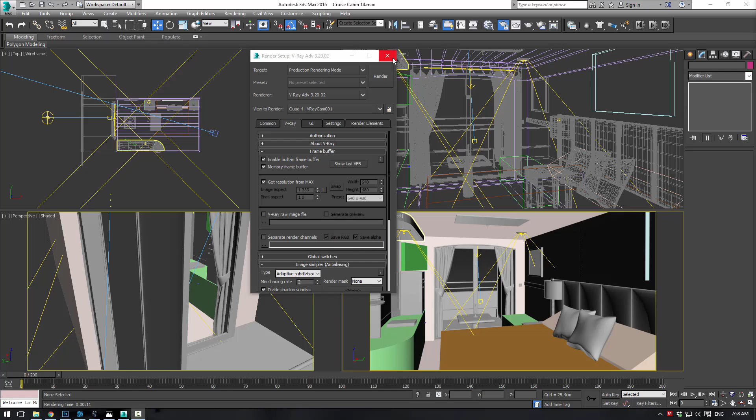Last time we worked on building this vent and the fire sprinkler thing. I wasn't totally happy with either of those, but we're just going to try to salvage it. First, let's make this a bit thicker, then bring it up a little bit since it was just a bit too big. Now for this vent, all that work we did, we're probably just going to throw out. I think we're going to texture in the little holes instead since it's not worth it in terms of rendering speed. I don't want to mess with it anymore. We can make it work if we really tried, but it's just going to be a pain, so we're going to pretend we didn't do that.

Shift F to get rid of those safe frames. Today I think we're going to focus on the desk. I think the desk is a solid choice here. So the first thing we're going to do is grab these layers, or these polygons. I believe that's all. Let's just bring it down a bit.

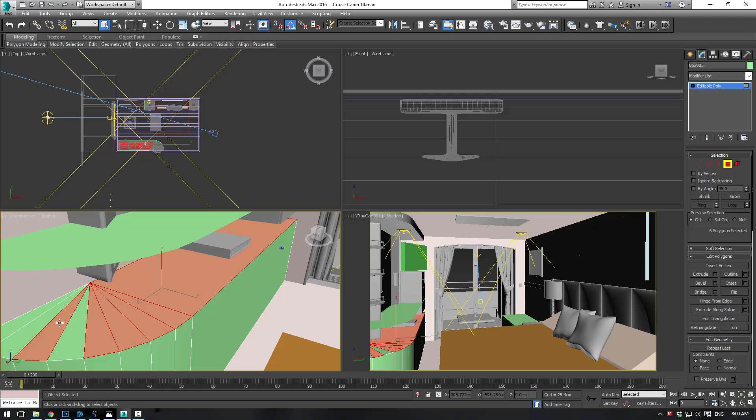Now we're just going to do some beveling. Actually, we're going to Shift drag that up and clone it to an object, because we'll use that later for the glass top. So let's select these polygons again, go into the top view here, and bevel. Let's just make sure this is doing what we want, and for the most part it is.

What we can do here, just to cheat a bit, is take these and extrude. There we go. That way our desk will work, so when we do our bevels it'll cave in on itself instead of not working right.

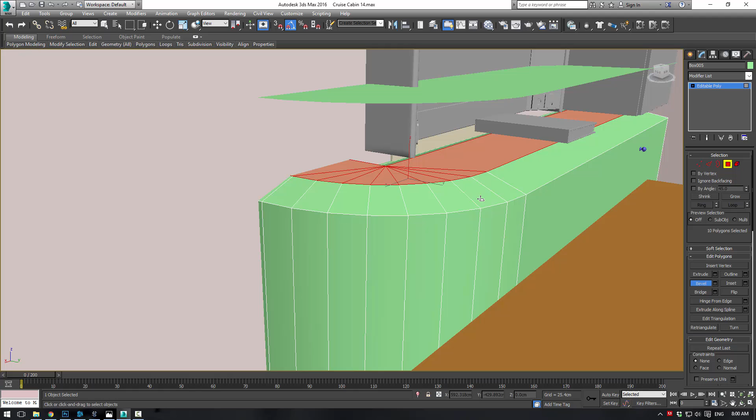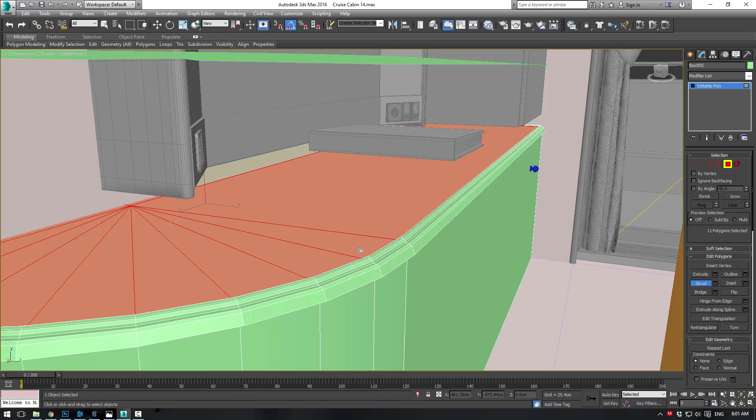Make sure you grab that one too. There we go. Alright, let's start with a small bevel right here, and let's do an outward bevel. Okay, let's bring it back in. Maybe do a small bevel here, bring it in a bit. Alright, that should be good. Bring it up, and let's bring it over one. Same level in one, and then let's go up a little bit, and one more in.

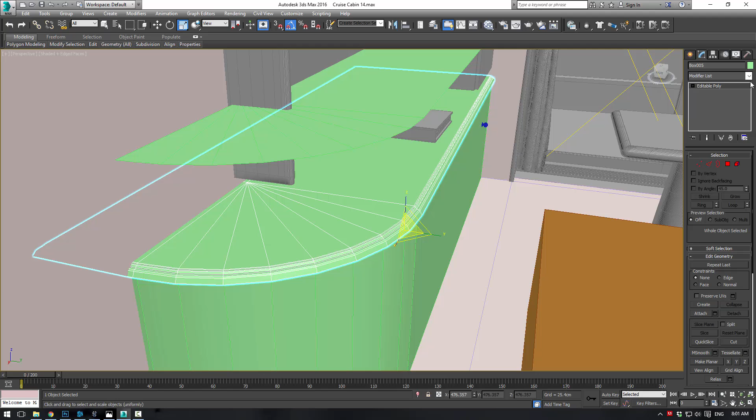Now what we want to do is grab all of these polygons here, including the bottom and the back, and let's actually detach those. So basically all we have is the top. Now if we apply a Turbo Smooth modifier to this, you'll see we instantly get that result we're looking for on the side.

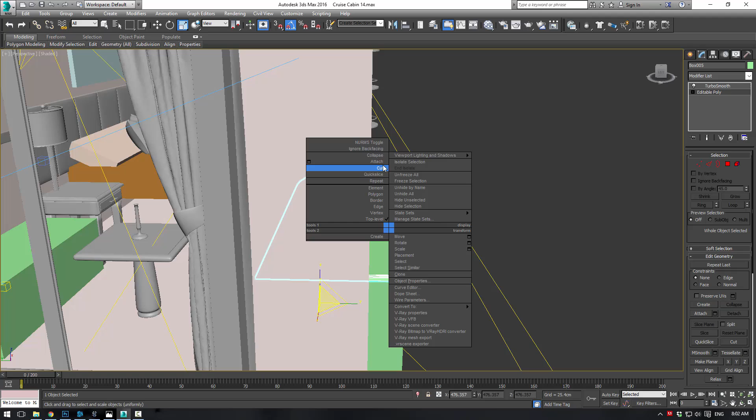Now we do need a bit of cleanup, so let's go back in here, edit poly, and let's see what we need to do. At this point we can isolate the selection just so we can see it a bit easier. And let's see, we can probably go here and connect and simply drag it down to about here.

Let's go into our front view here, grab these polygons and just delete them. Okay, go to your verts, press R, and simply scale them so they're straight together. So now when you do a Turbo Smooth, it won't smooth that corner at all, so you just have kind of a nice straight edge.

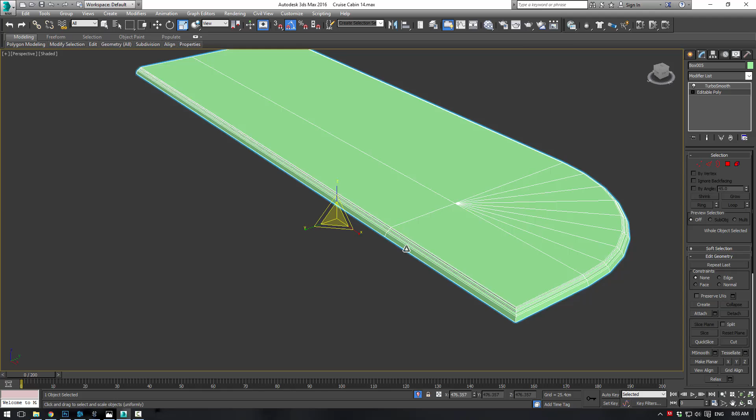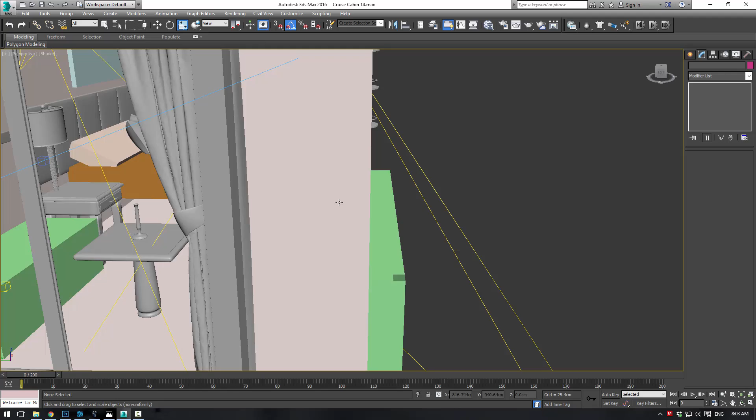We're going to do the same thing for the back here. The other option we can do is select all these polygons, deselect those, and I believe if we delete that, that should give us our desired result. Yes, there we go. So that's about what we want, and we can go to vertex here, press R, and just straighten those up. Alright, perfect. So now if we go to end isolation mode, we sort of have our little tabletop.

Now what we're going to do with this is go here and extrude it just a little bit. There we go. And then let's actually isolate this just to make it a little easier to work with.

And we're going to need to create some geometry here. So let's grab those lines and bring them down a bit, just to make it a little easier on us. So let's go to polygon mode here, and actually what we can do is just shift drag this.

Clone to element, and let's Control A, weld, and you'll see we have 6 welds, so we need a few more than that. 1, 2, 3, 4, 5, 6. Why are we not welding all these? Control A, weld. Alright, let's see what didn't weld. So apparently nothing welded. I wonder where the 6 things we welded were. So let's try a vertex here, target weld, and that'll work. We'll just do this all the way around. There's something wrong.

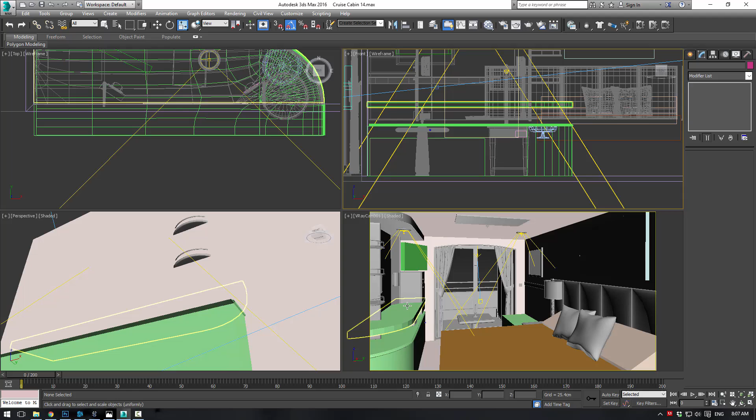So now what we've got basically is this. So what we need to do is actually go here, affect pivot only, center to object, just so it's easier for us. Just scale this down so we get a very thin sort of surface, which will be the glass.

Okay, and now all we have to do is just position it directly on top of this. Grab this puppy, and let's just bring it up to the level of the book. Right about here. Alright, that should be just about perfect.

Yeah, I don't think that will cause any trouble. Excellent. Alright, so there we go. Now we have the glass surface there.

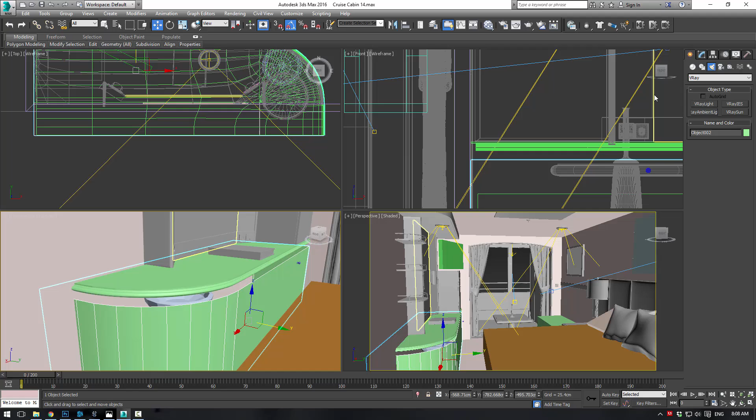And now let's work on the desk itself. So basically, what we need to do here is, let's see, let's isolate this just so we can see what we've got to work with. So we need to sort of create a cutout in here.

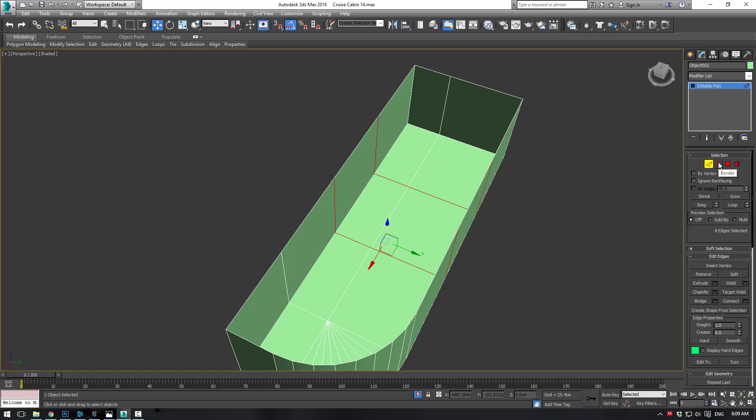So let's go here, connect, give it 2 connections and press OK. And now we need to grab this polygon and extrude it backwards. Okay, just like that. Now grab that polygon and delete it.

Okay, and then we need to grab this polygon and delete it. Good. So now go to our vertex mode here, target weld, and just weld this over here and this over here. That'll sort of give us the little box that we're looking for.

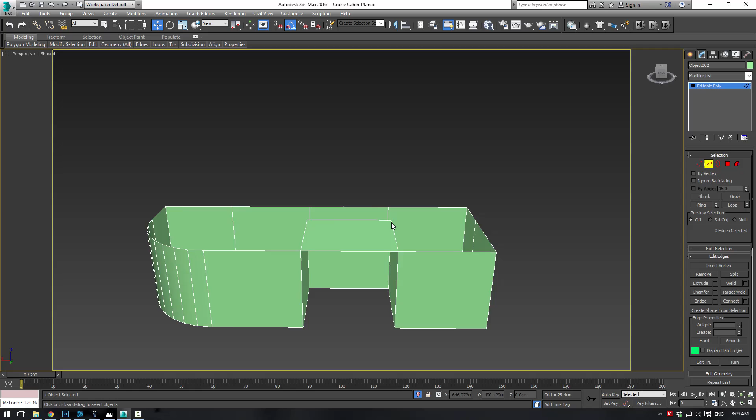And then you can come over here and just make sure that they are nice and aligned. Okay. So now we have that. You don't even really need the surface here. Well, I guess you do actually need the surface. Okay. So next, let's

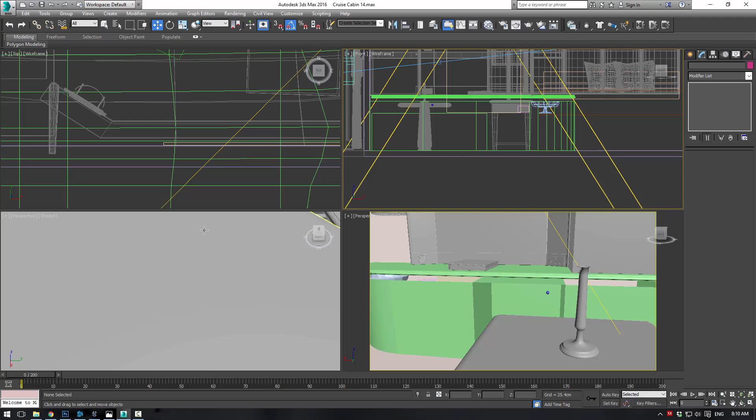think about this. How do we want to approach this? All right, let's end isolation mode. And what I'm thinking about here is the size, because I have no idea the size of this.

That is the one fault of working with only one image, is you don't really know. So here's that edge. The other edge is where? Let's hide some stuff here.

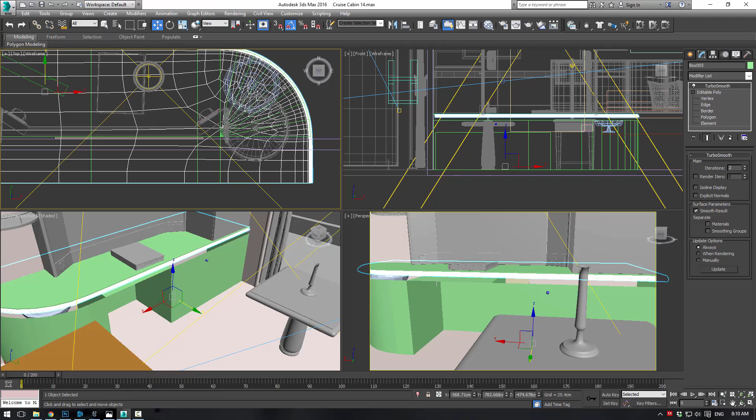Alright. So basically, wrong piece, we need this piece. So here we are. So here's the one edge of the mirror and here's the other edge. So we just need to sort of center it up there and just make sure we have enough room for sort of a chair.

So I'm going to say that is probably not quite enough. So let's just increase it a bit. I know we need to have enough room for a drawer as well, a little small drawer right here. And as soon as the curve starts, that's where the other big sort of drawer opens up.

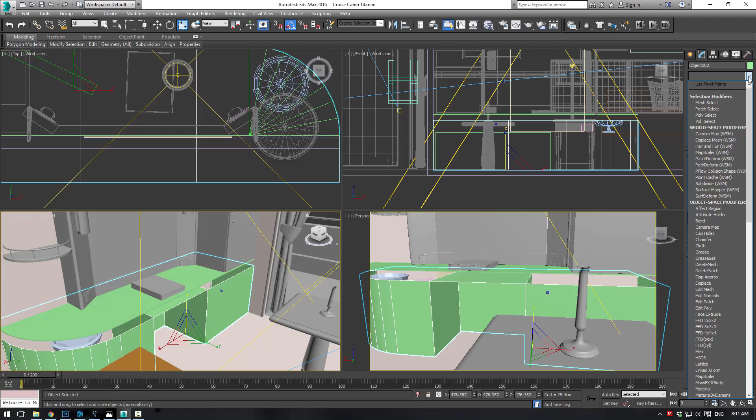Okay, so I'm going to think that's probably enough right there. Okay, so now what we can do is, let's see, if we turbo smooth that, what do we get? A lot of problems.

So let's go in here and we can delete out most of our problems. Well, we don't actually want to use that method. Let's go here, connect, and let's just pinch this outward on both sides there.

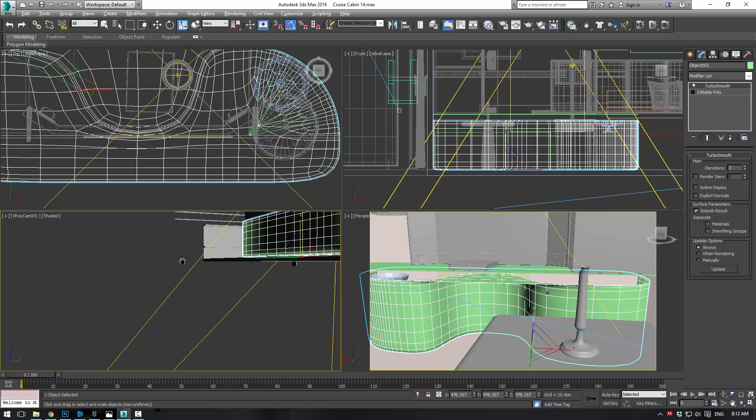Okay. Now what have we got? Damn it. I hate moving the camera. Alright, perspective.

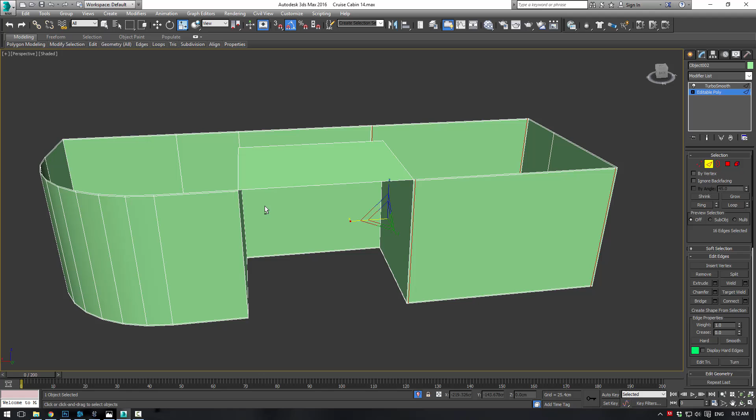Okay, so we've got that. Now we need to work on the edges here. So let's grab this, connect. Good. And then we can grab this, connect. That should be good. Grab this, let's connect it, and let's connect those.

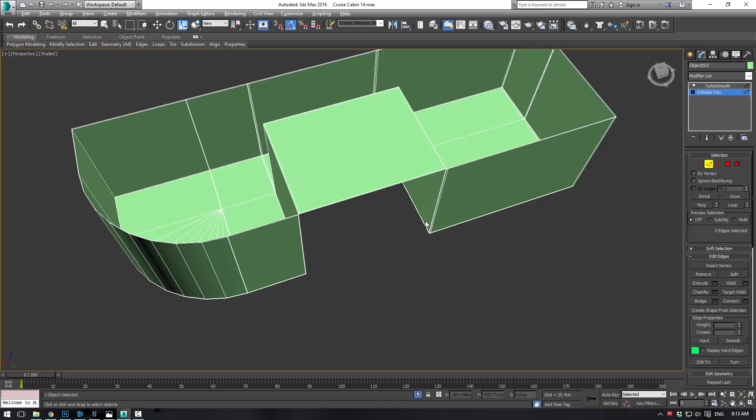And let's finally connect that and this corner. Alright, that should resolve almost all of our problems. We do have some interesting curvage here.

Guess it didn't quite connect. It's not a big deal, so we're just going to do the age-old tactic of deleting the bottom polygons, because that prevents the turbo smoothing from doing its thing.

Alright, let's just Control A, go to the front viewport, and delete everything that's not directly on the bottom. Bingo. So now if we turbo smooth, it should be perfect, with nice crisp edges and corners.

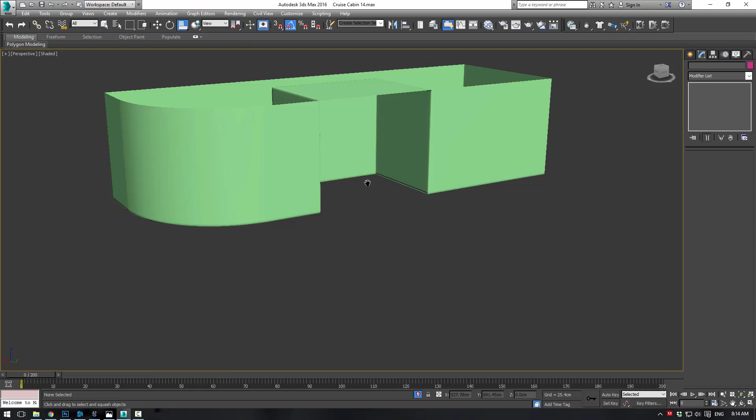Everything's happy. Now what we can do, if we want, is grab that and shift drag, well, extrude in just a bit. That'll give us a little curved edge there in the bottom. Right, end isolation mode.

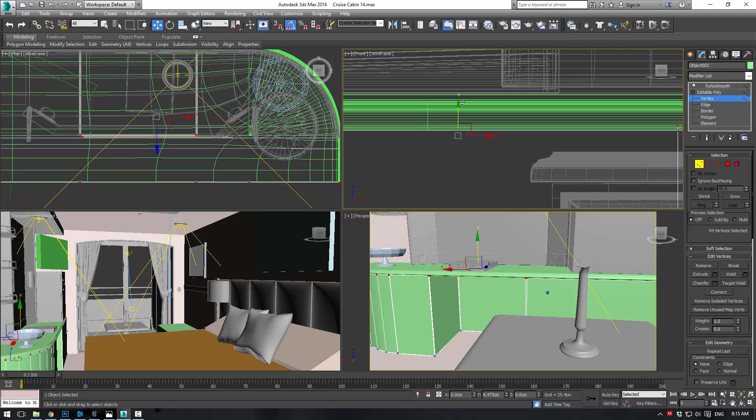Now we need, oh, I wondered where that fan went, I've been looking for that the whole time. Alright, there we go. So go to our vertex mode, grab all the top verts, and actually let's unhide all. Okay, and let's just drag these up, so they're sort of inside the desk there, just a little bit. Right, perfect, there we go.

That looks pretty good. I'm thinking though that maybe our opening is too big for the chair. Watch out, your scale needs to be on uniform. Okay, there we go.

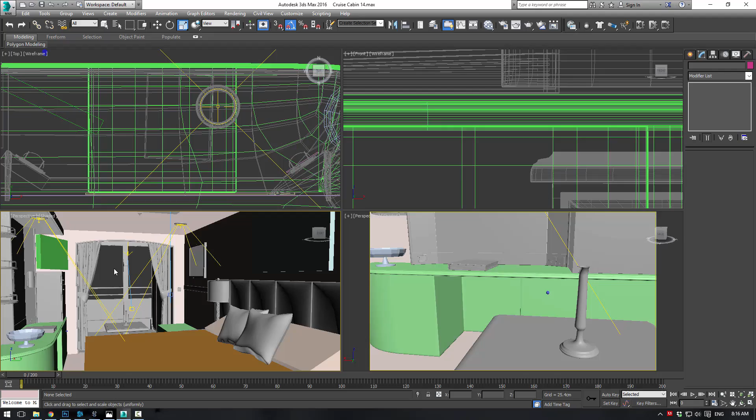So now what can we do, let's see. We need some drawers here. So we're just going to go to group, ungroup, and grab this, it's literally the same thing. Okay, we'll just reuse these. It looks like we're going to have, I don't know if it's one set or two sets. I think they're really long drawers, so we'll assume two sets. Okay, let's grab this, this, and isolate. Now we can do our drawers here in peace.

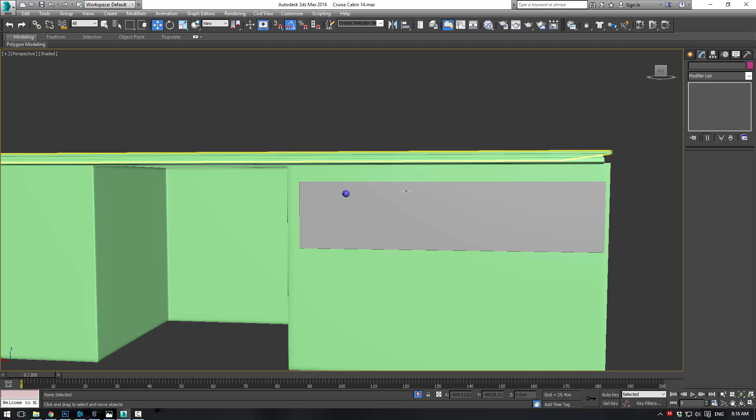Okay, so let's just make sure they go almost to the edge. Okay, there we go, and bring it up, kind of a little below the top there. And for our piece here, we'll just sort of center it as best we can.

An easy way to do that is just create a box with auto grid. Okay, there's your box, give it one segment in each direction. Now if you just line this up with the center of that, you're good. And then line it up, well, you don't have to worry about the other one, but okay. Perfect, so now let's just see how lucky we are.

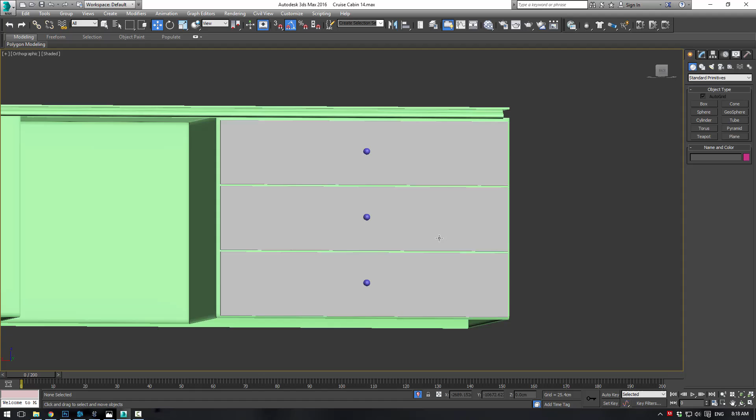And man, I gotta say, it doesn't get much luckier than that when your boxes just sort of fit. Okay, so there's those drawers. Now grab those and shift drag them over here. And actually, we can probably bring them right to about here.

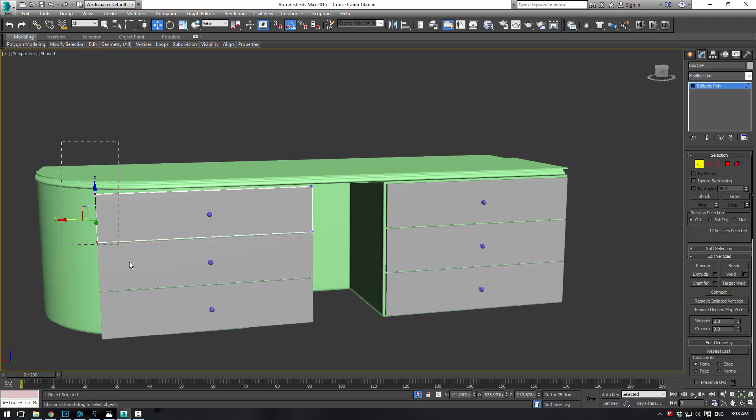Grab these portions, and actually let's just create one. Alright, now these are going to be sort of smaller, so let's see what we're going to do here. You kind of see where the edge of the desk curves, so this is the edge of the curve right here, so little short drawers.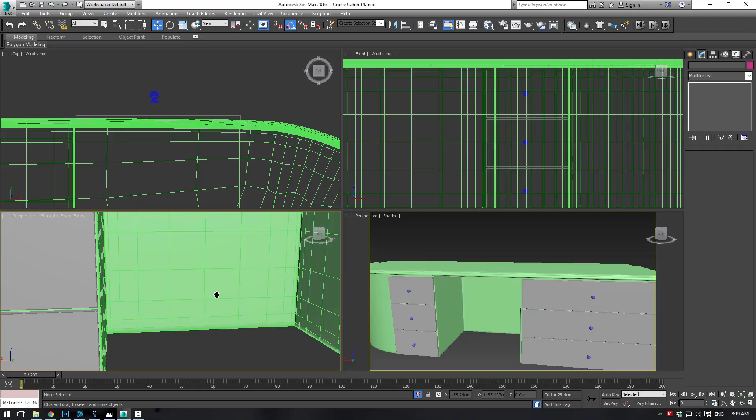And then we're basically going to, let's grab this polygon, and we will grab all of these, press W, and shift drag them out, clone to object. Okay. Let's give this a shell, we'll give it an inner amount. Well actually, no, we do want an outer amount.

This is, by the way, the easier method of creating geometry that I just thought of. And then let's ensure that it fits. So, affect pivot only, center to object, little T here. Alright, so move it into position here. Theoretically, you'd like to hope it would fit perfect, but...

Unless I rotated this, I have no idea why this isn't fitting. How strange. I must have rotated it and didn't know it. The heck? Oh well, I'm sure someone saw my mistake at some point.

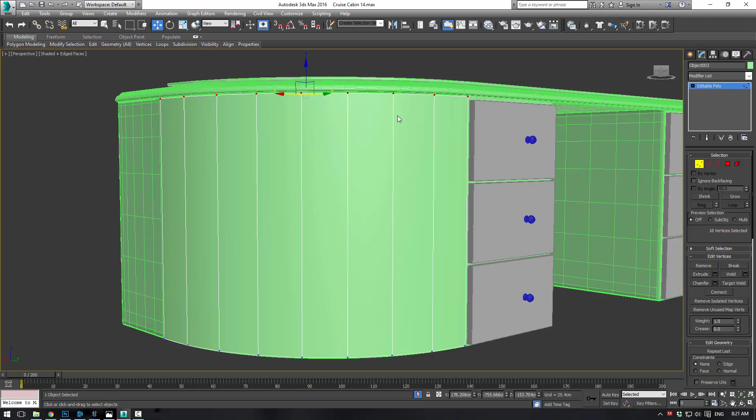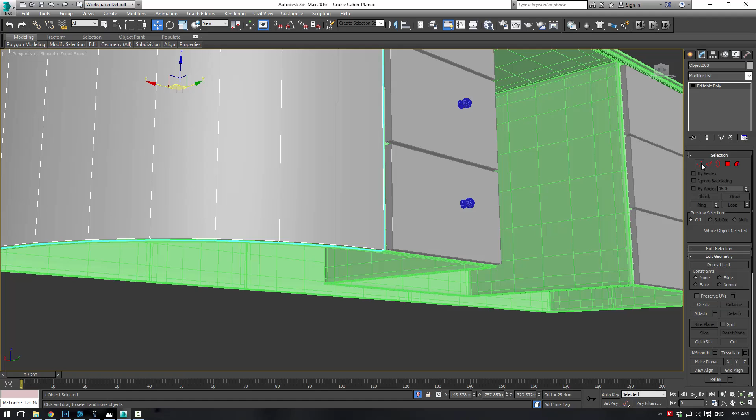Okay, and let's just convert to an editable poly here. Grab these top ones, and in the front viewport, bring them down so they match the gray ones, right below the line there. Alright, let's just make these gray so we can see a little easier. Alright, and then let's grab the bottom verts and just bring them up a little bit, just so they're not resting on the floor. Okay, and that looks pretty good.

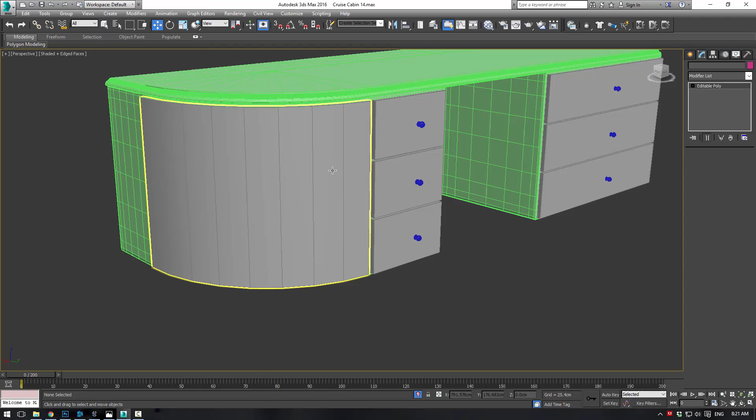Alright, so grab all of this stuff here and do a connect, two connections, pinch it out, 98 will work, and then I'll go here, shift, connect, and do your small little pinch. Okay, and then if we do a turbo smooth, I think we'll need one more line, but we do need a line in the corner there, but we're almost perfect.

Okay, so just grab the edges here, connect, you want one connection, and just slide it over the edge there. Watch out. Connect, and then do the same on this side, except you want to go the other direction for your connect. Minus 92.

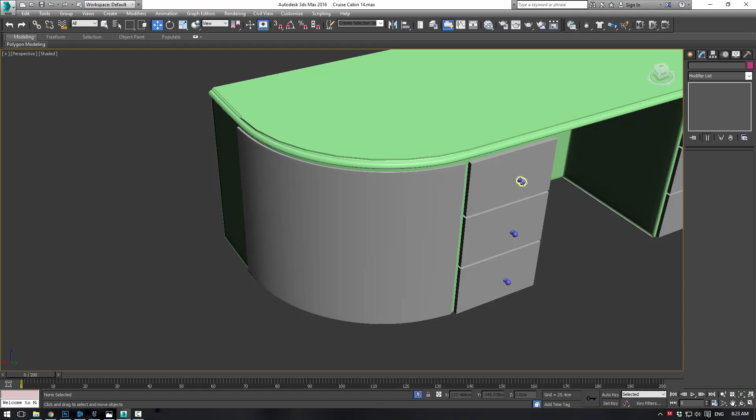And there we go, now we have a nice little cabinet piece. So grab this and just shift drag it over, and we can sort of put it in here near the edge where it would actually be, or at least almost be. You can probably rotate it a bit, it's fine. There we go.

Now what we can do is, ooh, these are all sort of floating in space, aren't they? Let's bring these back. So select everything here, assign it a gray material, end isolation mode here, let's go into our camera view. Let's see how we're doing.

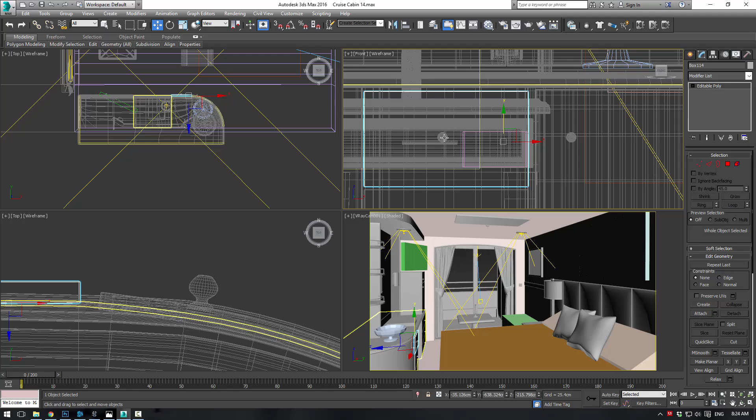And man, I think we did pretty damn good with that. Although this, we may need to make it a bit higher there, okay, just so it sort of matches, and then this one maybe bring it a bit higher as well. Actually, we can, watch out, just select all of this. That'll get all three of them, and just drag them all up just a little bit. Okay, perfect.

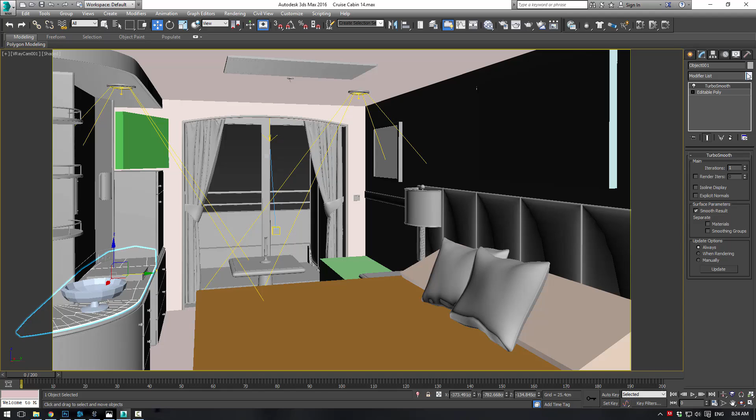So there we go, that looks like, ooh, this top piece, we forgot this. Let's give this a turbo smooth, and then we'll fix that real quick. So isolate selection, perspective.

And so this needs a little bit of treatment here. So connect, one connection, and slide it over the edge there. And then just get a little closer. And then we're gonna need, let's see, actually that's probably not what we want to do. Let's select all of the internal polygons here. Inset, we'll just give them all a very small inset.

Okay, and now if we turbo smooth, that's not what we need either. Okay, so we do really need, we need to do the edges, that's what it is. So select that, control click, I'm just selecting the corner edges here and chamfer. And you'll see now the corners are getting a little chamfered.

And that should resolve our problem, mostly. We'll just connect that anyway and see what that does for us. Ha, success, and mostly success.

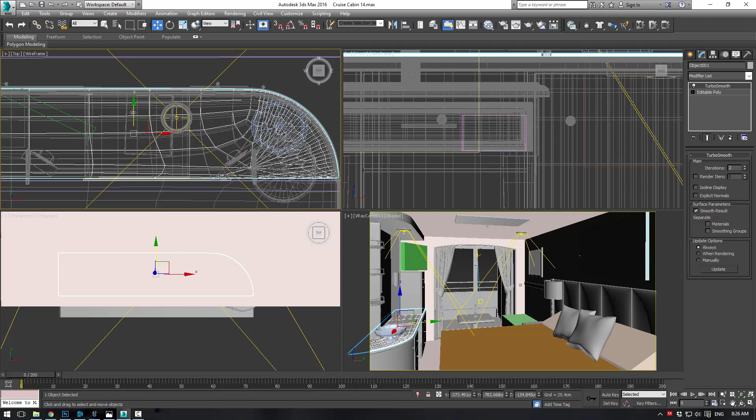That looks pretty good. Maybe I actually grab this and move it back just a bit, and then move it over just a bit, just so it's sort of on top of the surface, not right at the edge. All right, perfect, just perfect. All right, so that'll be the end of this part, and I will see.

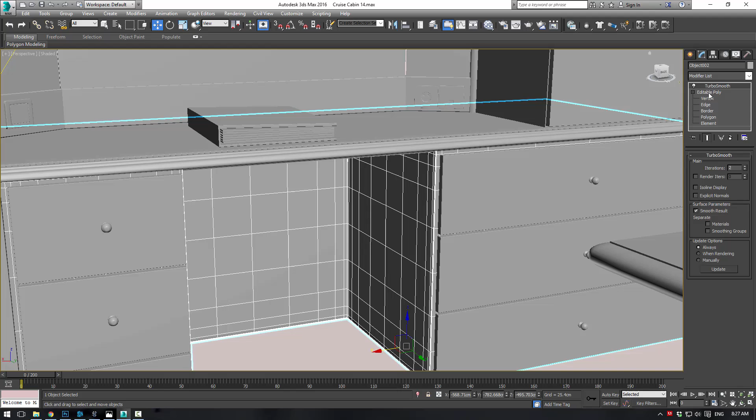Wait, no, I was almost ready to give up here. Looks like we're missing a drawer. So perspective Z, let's fix this. So there's actually a drawer right here. So how are we going to fix this?

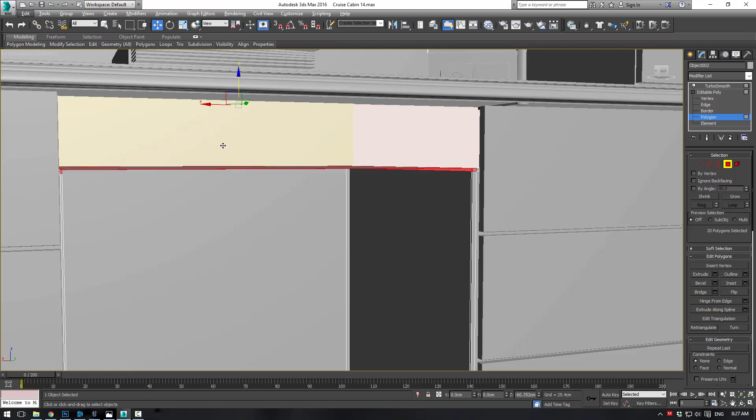Polygon, let's grow it. And grow one more time. Alright, so what have we got? Okay. So what we need to do is press 1, grab all of these, and actually let's isolate this selection here. Alright, so we don't really have a top on it.

So basically we need this to sort of come down here. And then, alright, how about we just select this edge, and this edge, shift drag down a bit, and then shift drag back. Yes, and then we need to chamfer this edge, just give it a very small chamfer. That's not quite what we want.

We really do need to do this correctly, I guess. So we'll undo that. We won't undo that, that's cool too. Just delete these things we made. Okay, how do we want to go about doing this? There's got to be a method here.

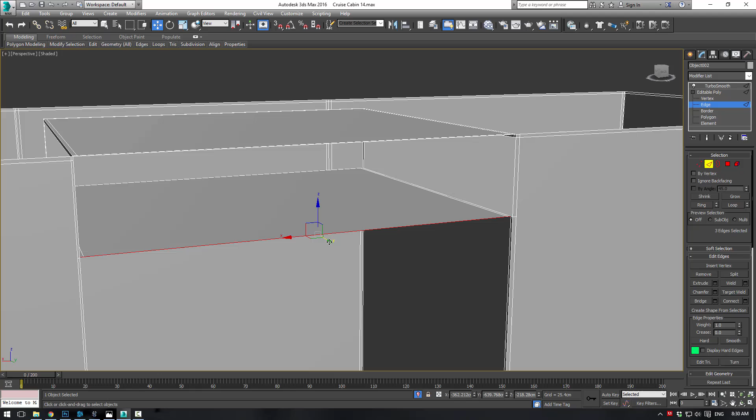Alright, and now what we can do is take this edge here, grow it once, and shift drag it out. Okay, do 1 and 2. Alright, now what we need to do is go to our vertex mode here and target weld.

He's not going to want to weld. Oh, there they go. And weld. Good. And then let's go on the other side. Weld. We should be 2. Good.

Alright. And now we need to grab those same lines and go up and then up. Okay? Just like that. Weld. 2 have been welded. Alright, go here, weld, and 2, only 1 has been welded.

There we go. 8, 7, 6, 5. That's too many. Let's see exactly what's going on here. So we'll go to target weld. Sort of odd.

Why don't you want to let me weld you? Ah, that's why. Alright, so target weld. Alright, that should be almost all of those. Nope, not this one yet. What's this one connected to?

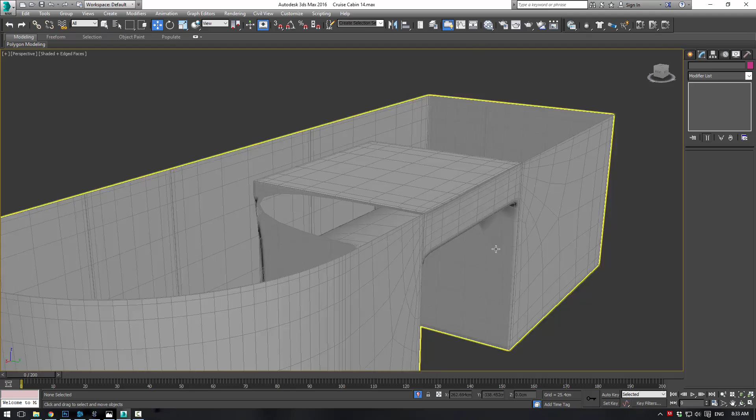Oh man, we're so close. Well, we're not actually that close. Alright, we're going to take some drastic measures here. So let's just grab this and this and delete.

Alright, that sucks. I should have remembered I had to do that piece. Alright, and delete. So there we go, now we're back to square one here. Delete that. Whatever the heck that is. Delete it. I don't need it.

Alright, make sure that doesn't have any. Alright, delete. And delete. Okay. So now how do we do this? We need a line sort of here.

Alright, so control, shift drag. Okay, we got that. Problem is that's not what we want. We just want to bridge these. That's really all we need.

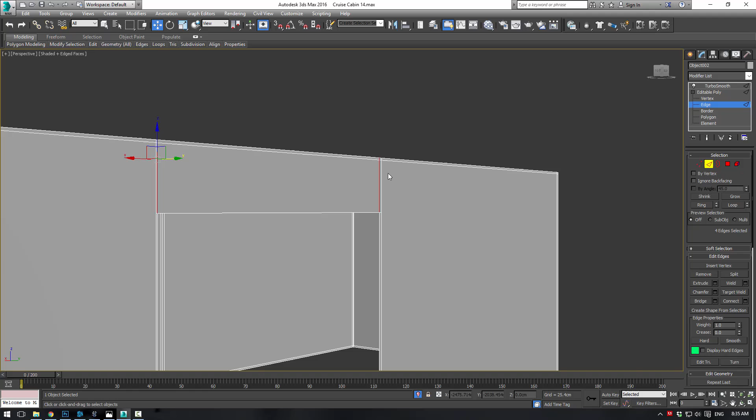And then we come in here, grab these three, or four, I guess, and 5. Okay, and then we can shift drag it back a little bit, and then shift drag it more, and then what we can do is

grab this top line, oops, careful, and just see, drag it down and drag it down. Okay, grab your vertices in the corners there, and you've got your 2, and you've got your other 2.

Okay, oh, we're getting much closer now. Okay. So now what we need to do is add some chamfers. Actually, don't really need chamfers, we just need edges. So go here, deselect your back edges, connect,

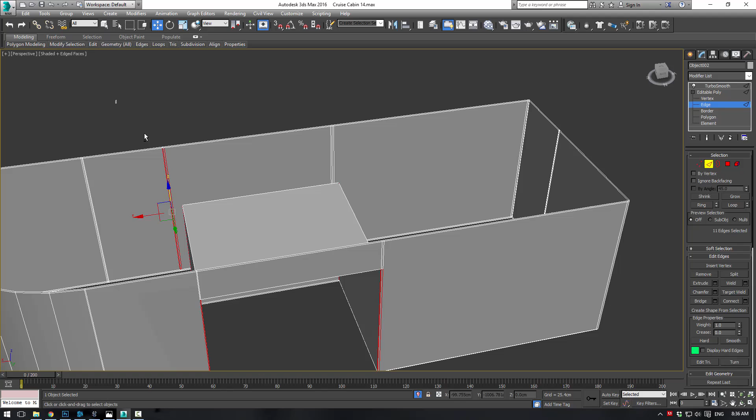and bring the slide up to the top there. Okay. Now, let's see. Alright, now I need some on the edge over here. So, let's just do a connection with 2, 0 slide, and 99 pinch. And there we go. That looks pretty good.

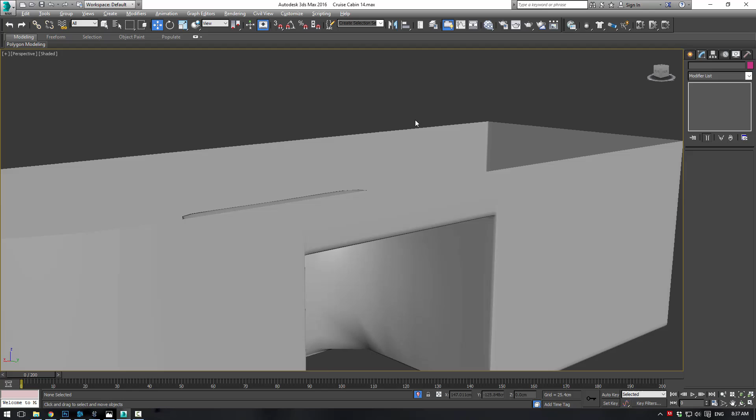Now remember, a drawer will be covering this anyway, so it sort of doesn't matter about the back as much. But if we want to make the back a little nice, we can just grab it all.

And grab the bottom pieces. And just extrude them back. Or, actually, we don't want to do that. We need to see why this isn't welded.

I don't understand that. You know what? It doesn't much matter. We're just going to delete this piece because you're not going to see it, and it's just causing us more problems than anything. There. Problem solved.

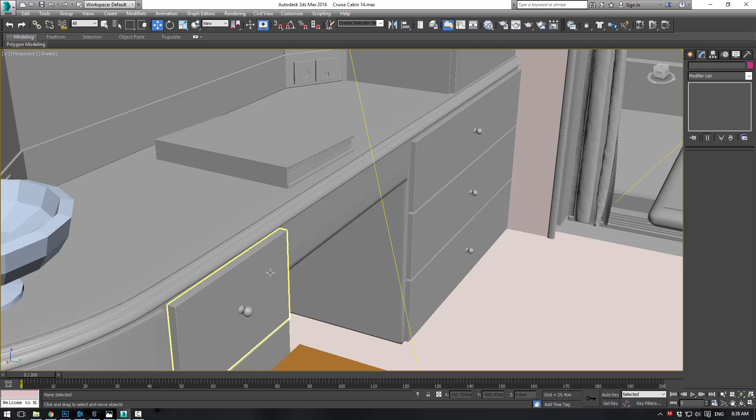Okay, so end isolation mode, and let's just drag any of our drawers over here. Okay, Alt W, let's just grab this piece here, press 1 and adjust it to where it sort of meets.

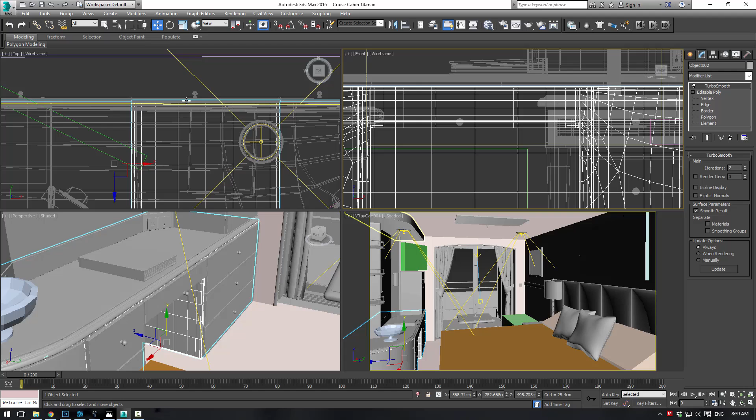Okay, and now this is going to be a smaller drawer, about half the height. So that's about good. Alright, and now we can grab this little piece and sort of center it up here.

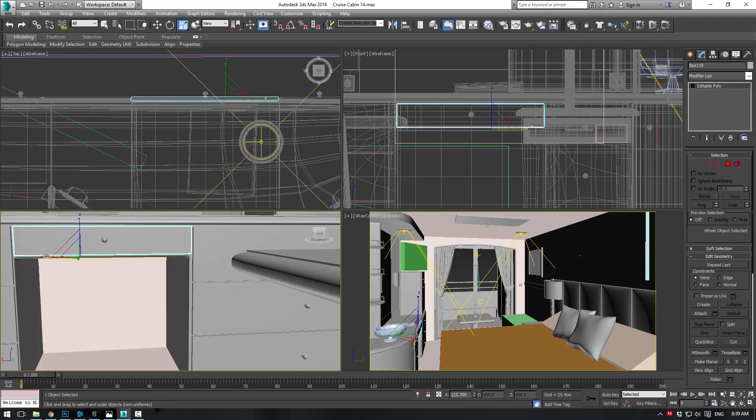Alright, there we go. And now, if we look, now we've got the right drawers that we need. And actually, I think we can probably scale that in just a bit. Alright, perfect. So there we go.